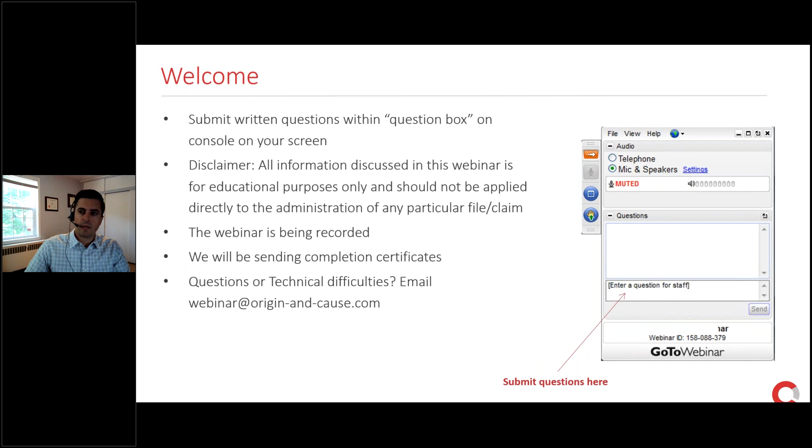All right, thank you, Mark, and thank you everyone for attending the presentation. I am going to be talking about agricultural equipment fire losses and trends we see with the changing seasons.

Just a little bit about myself. I'm a mechanical engineer, I'm based in our Winnipeg office, and I'm a licensed engineer throughout Western Canada. I've investigated over 800 different losses of various types. Based on that, my background and location, a number of those losses have been related to agricultural equipment and fires.

Most agricultural operations are typically tied to the changing seasons. Because of this, different equipment is operating at different times of the year and in different operating conditions. Therefore, there's some seasonal fluctuation with what fire-causing incidents we investigate. In this presentation, I'm going to be discussing the different conditions, the different work being conducted, and some of the more common fires in each season.

We'll start in the spring and look at seeding and planting operations. Then I'll move into the summer, we'll talk about haying in the fall and harvest time, and then we'll finish up in the winter and talk about fires in equipment related to working with cattle. So this isn't to say that all types of fires can't occur at any time, it's just that some are more common at certain times of the year.

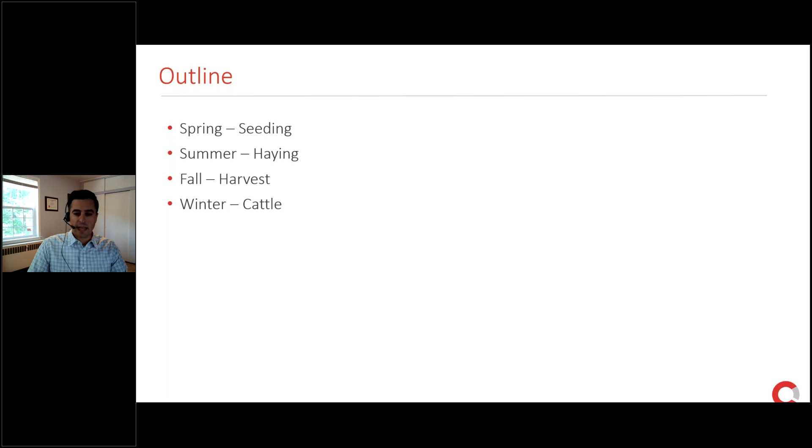So we're going to start in the spring. It is finally spring here. It was a bit late getting to spring, but we have had really good weather in the field since, so the bulk of planting is done in this area. Agricultural operations in the spring include preparing the fields and seeding.

So we're seeing bigger seeders, bigger grain carts, and that essentially results in larger loading on the tractor, increased load, increased temperature, but also you're putting more stress on engine components, hydraulics, that kind of thing. So increasing that load increases the potential for a failure.

The other thing that happens is that because this equipment is not in use through the winter, a lot of that major off-season service work can happen through the winter, and spring is the first real test to see how that servicing went. So there's the potential for failures related to service through the spring as well.

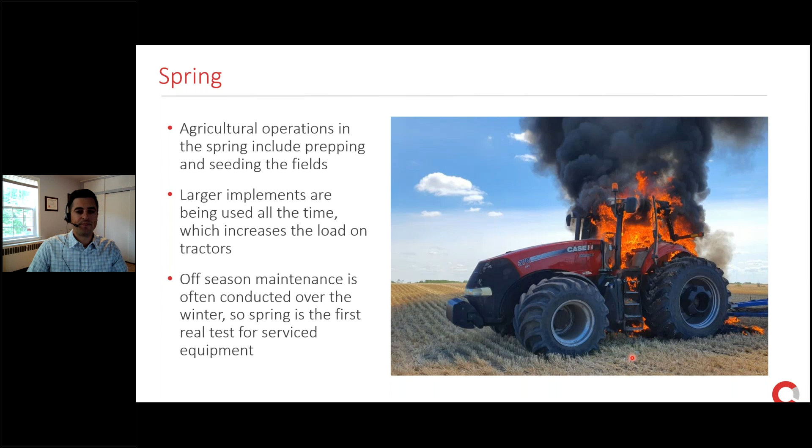Here's an example of a tractor that was operating in the field. This was pulling a harrow, so prepping the field. Harrows are used to overturn the soil. It was a large tractor, but operating under fairly heavy loads just because of the conditions.

The operator was in the field, was operating without issue. All of a sudden heard a bang, lost power, and there was flames coming from the engine compartment. This fire did spread very rapidly.

The operator shut the tractor down, exited the door here, and then actually had to jump off that top step because there's already flames coming around that area, even though he'd exited the tractor basically as soon as he saw the flames.

Service work was conducted on this tractor during the off season, and that work included replacing one of the two turbochargers on the left side of the engine.

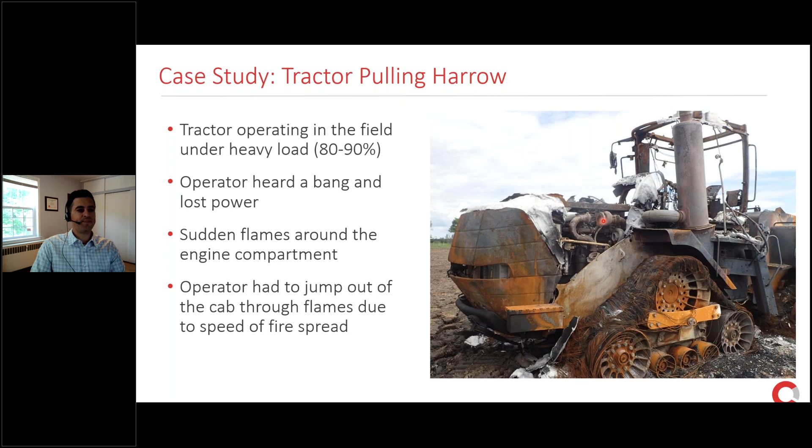Here's a view of that left side of the engine. Exhaust manifold here, and the exhaust is routed into this first turbocharger. Exhaust then goes down to the exhaust side of the second turbocharger and then out the tractor.

On this second turbocharger, you can see that the intake side is present, but we don't have that on the first turbocharger. Now, it is possible to get a large enough fire to melt off this intake side, because it's cooler, it's made of aluminum, so it does have a lower melting temperature. So it's not uncommon to see a turbocharger where the hot side's fine, but the intake side's melted off.

In this case, however, we do have a fractured section of that intake side of the turbocharger just sitting down here in the engine compartment. It is not melted, so although we had some melting damage around here, this shows that part of the turbocharger had actually fractured prior to the fire occurring and resulted in the fire.

So here's a cutaway of a turbocharger. Again, exhaust enters the hot side, spins the vane in here and then exits, and that in turn spins the shaft, which runs the compressor vane. Air is incoming, pressurized, and then sent to the engine under pressure.

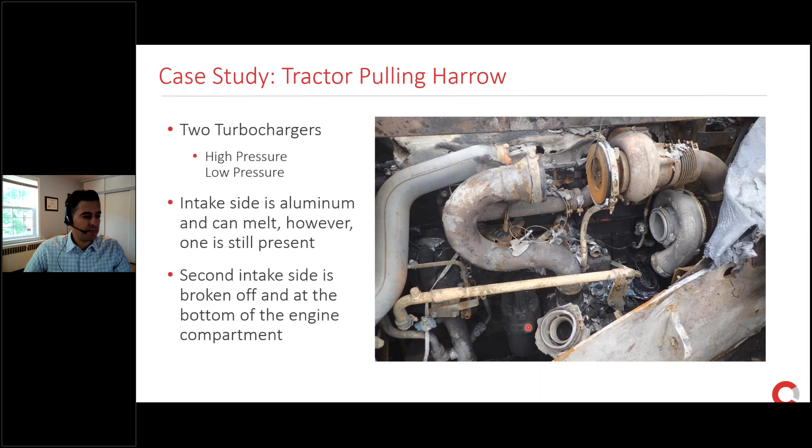The profile right here of the intake side of the turbocharger is actually what we're looking at right here. And if you flip this over, that's what we're going to be looking at. You can see some scraping damage on the housing, and this damage occurred as that compressor vane blew apart and fractured the turbocharger.

So we know the turbocharger failed, and that resulted in the fire. Now we have to be looking at whether or not this was an installation issue or a manufacturing issue.

The turbochargers are supplied with oil. So there's an oil inlet here coming off the engine, and that's going to be lubricating these two bushings. The reason for that is once the shaft spins, it's essentially spinning on a film of oil, so you don't have any rubbing damage on that metal.

In this case, we were able to confirm that the oil line was connected properly. There was oil supplied to this turbocharger. So the failure in this case was due to an internal issue with that turbocharger.

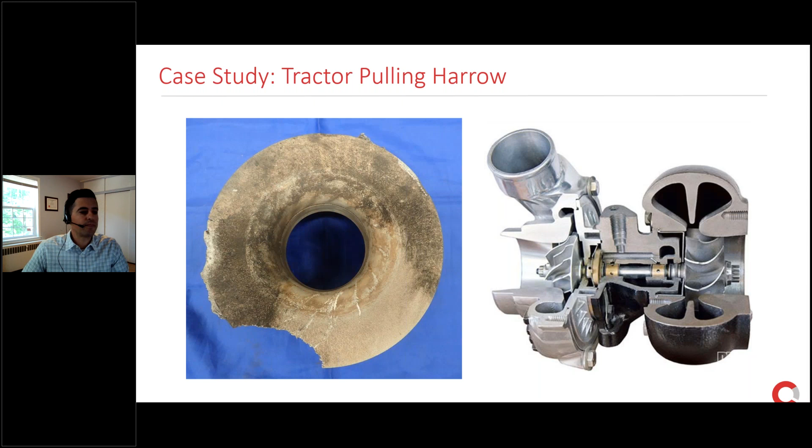So now we're going to move into the summertime. Agricultural operations in the summer, we do see some spraying chemical fertilizer in the field. We don't really get as many fires with that equipment. Sprayers still have an engine, so there's still the potential for fires and failures there, but due to the layout, the amount of work and the loading on it, it's less of an issue typically.

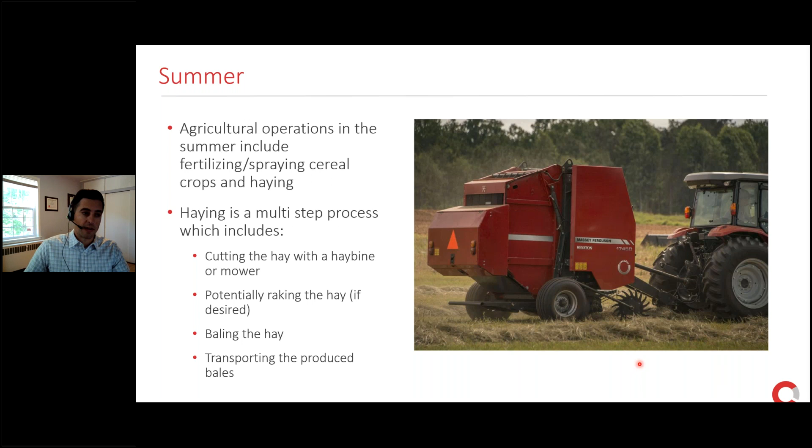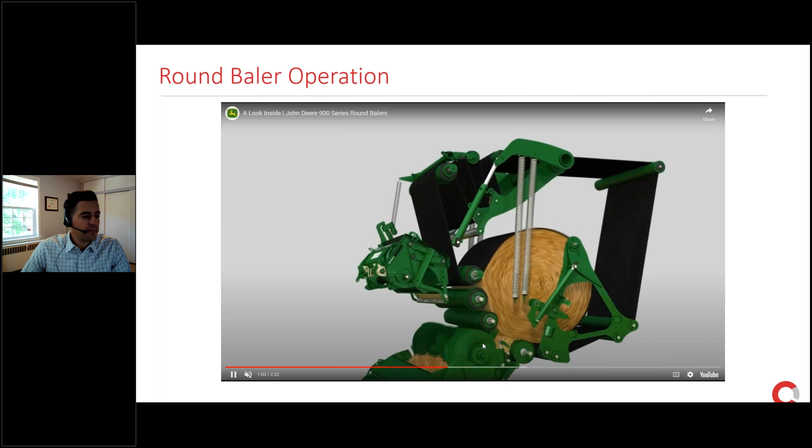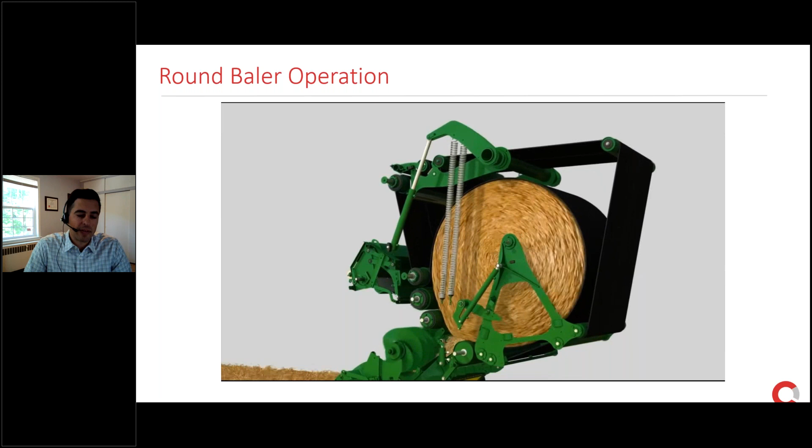I'm going to pop up an animation of a baler operating. Basically it's starting to pick up the hay through the pickup in the bottom as it travels along. It rolls in here, and you can see there are a number of rollers throughout, and a belt helps keep pressure on that bale in order to keep everything in the right place and also keep it larger and packed.

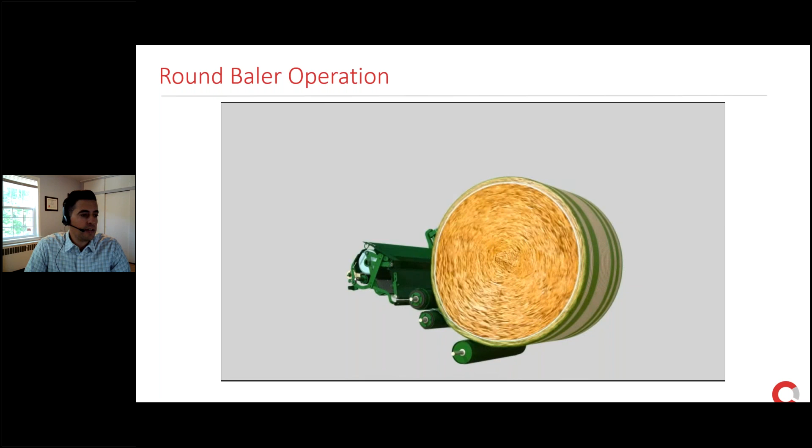After the bale is produced, it's wrapped to keep it all together once it's ejected out of the baler. It used to be twine that was used; now we see a lot more net wrap that does the whole thing at once, which is a lot quicker operation. Once the bale is wrapped, it's ejected, kicked out of the baler, and it can be pulled along to start getting new material in there.

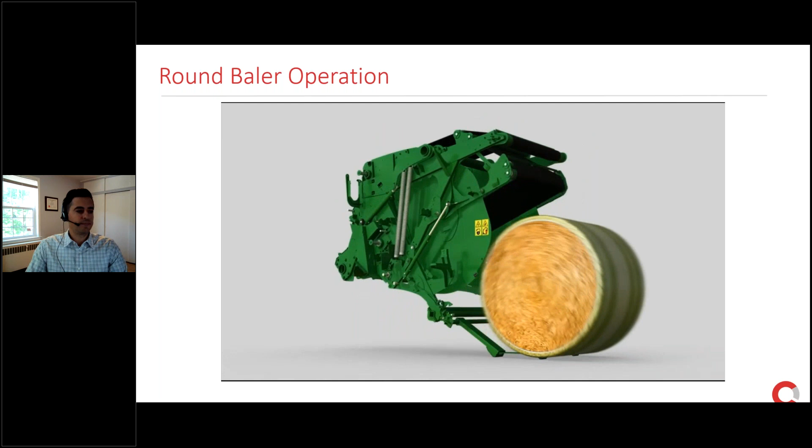A couple days prior to this fire occurring, there were two rollers and some belts changed inside the baler by a third-party service company.

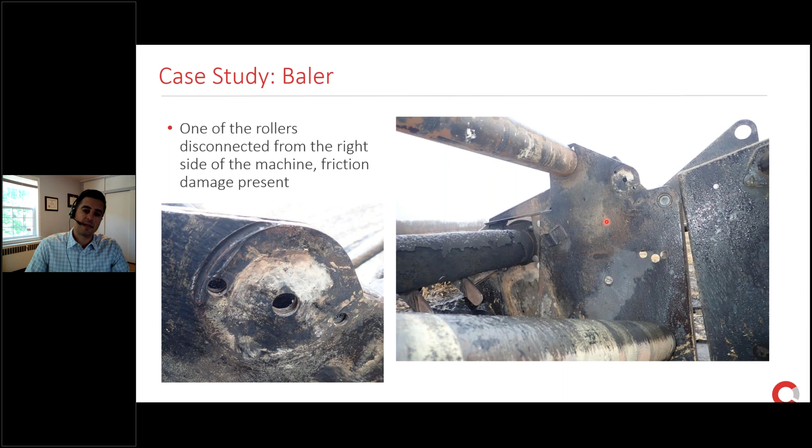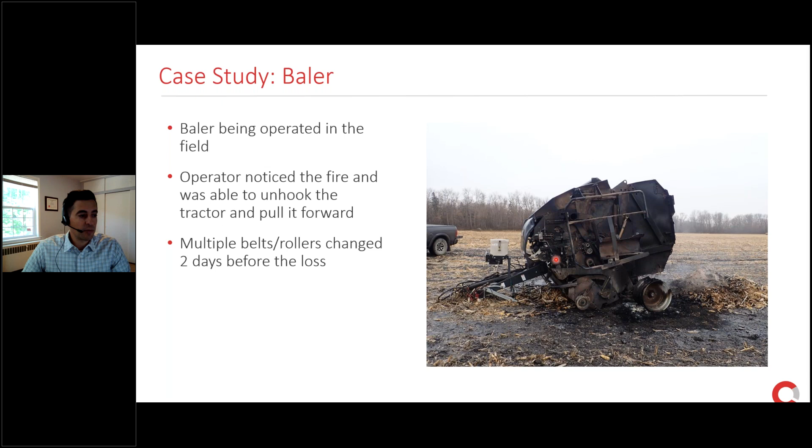I'm just going to go back a couple slides here to show the side of the baler. There's a device right here that is a centralized grease port, with one on both sides of the baler. The grease is supplied there, and then these lines take it to different locations throughout the baler where the grease is required.

This bearing did have one of those grease fittings coming from the centralized port. It was fractured and damaged, but it was still attached in the proper location. There was evidence that the other bearings on the baler were being greased, so it did appear that the standard greasing procedure had been followed.

This is that incident side of the roller. This is where the bearing would be located, but the bearing was not present. So not only was there rubbing damage on the side of the baler, but essentially the whole bearing could have gotten wrapped up in that bale, which would have been hot enough during failure to ignite it.

This is the opposite side of the roller - this was the intact bearing. Basically the inside of the bearing is around that roller, secured to the roller, and then there are the rolling items in here. In this case it's a ball bearing, so there are a number of steel balls in there, and the outer race was secured to the side of the baler. Because it's just steel on steel, you do need that lubrication in there, so there's potential for failure if there's improper lubrication, but we were able to show that that wasn't the case this time.

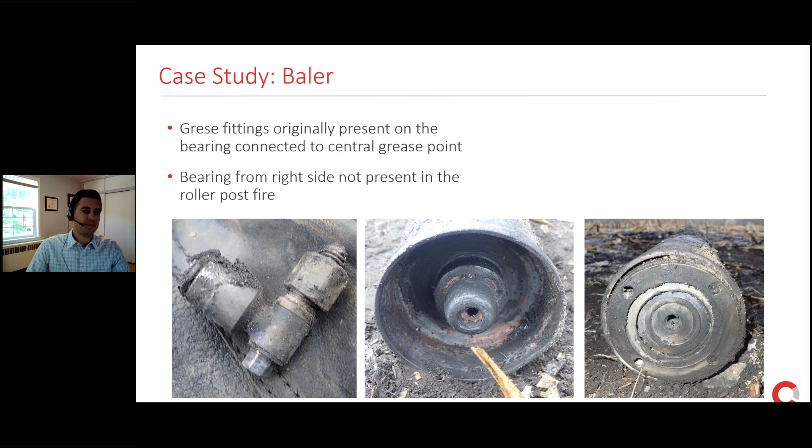Here's another example of a baler that was being operated in the field at the time of the fire. This picture makes it look a little more like wintertime than summertime, but sometimes there's just a bit of a delay between us getting involved in the file.

The reported information we received was that the baler was in the field, was operating, and they had no troubles operating. The farmer kicked out the last bale, went and parked the tractor and baler, always parking it behind the stand of trees so it's not visible from the road. He left for the day, came back to get it and start baling again, and found it in this condition.

Interesting fire patterns to note here: we have a lot of fire damage at the back of this baler, and a lot of damage at the tractor, but there is less fire damage through the middle. Not a lot of patterns to support fire spread from the tractor to the baler or from the baler to the tractor, at least visible in this photograph.

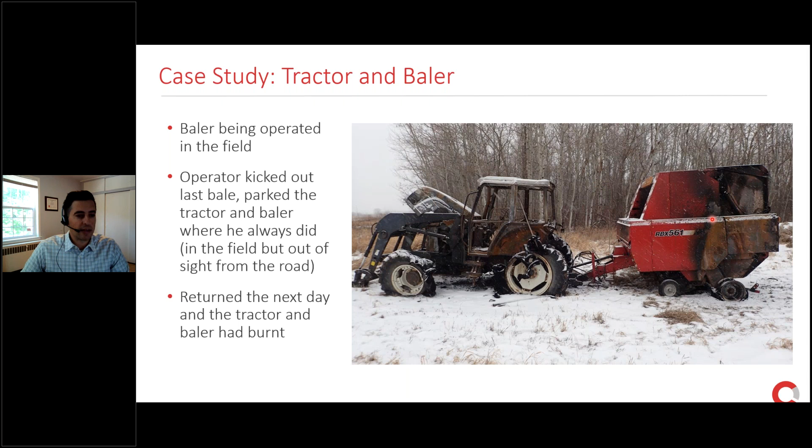Again, we're looking at rollers in that baler. There are a number of rollers throughout, and you can see that there's another one here that is not in the proper position. It's fine and connected on the right side, but not connected on the left side, either a bearing issue or a bolt issue.

But when we look a little closer at the side of the baler itself, we can tell where the roller isn't connected, but we don't see any of that same frictional damage. There's a little bit of rusting and some fire damage, but no deep gouges or anything to indicate that this failed during operation.

One more thing to notice at the back of this baler: there's actually a second roller that's also out of alignment. Once again, it's connected fine on this side, but over here is no longer connected, and similar to the upper one, there's no frictional damage on the side of that baler.

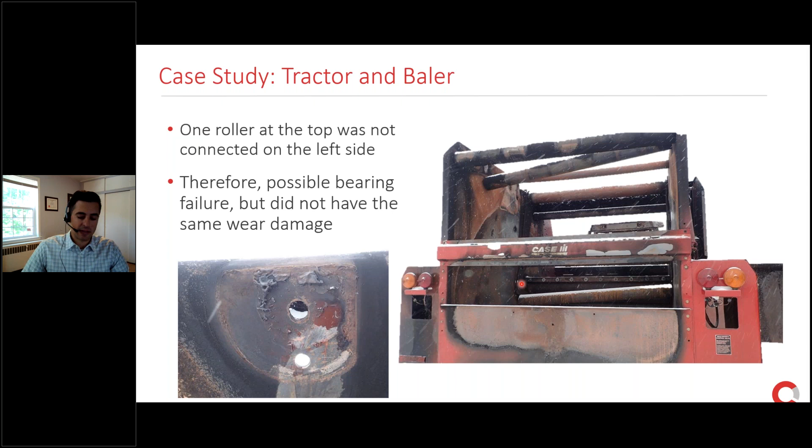Now this is the area between the tractor and baler where the baler is connected. There's a hitch on the tractor and there's one open hole, but just the way this U-hitch was designed, it might not look like it, but the baler was properly connected to the hitch. The PTO is also connected, but up here is where the electrical connection between the baler and tractor would be.

In the tractor, there's a monitor to run the baler, giving output on how the bale is forming, weight, speed of the tractor, and if it needs to speed up or slow down, and also controlling the wrapping. In order for all that to be output, the electrical connection would need to be connected.

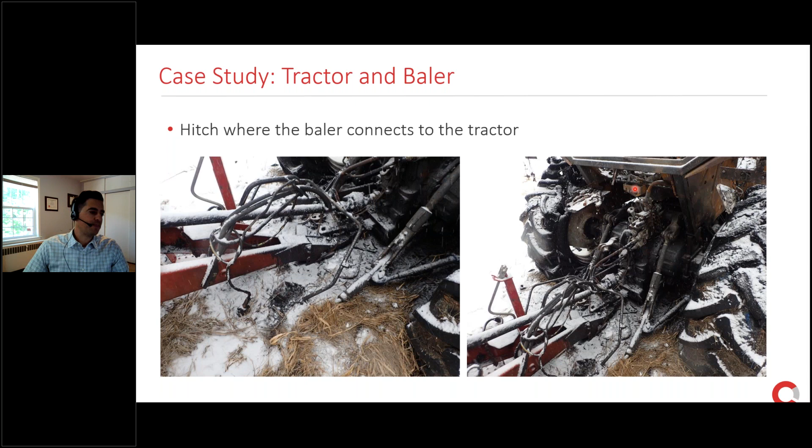But in this case, the electrical connector was just laying down by the hitch, into this organic material, and we can see that some of it actually melted and adhered to it. So this connector was definitely not connected at the tractor. Also, the way it was wrapped up here, it was physically not possible to stretch it all the way to where it needed to be connected on the tractor.

So basically, the fire patterns don't really connect between tractor and baler. There were multiple broken rollers, but no evidence that resulted in heating damage at the baler itself. And we can show that the baler wasn't even connected in the way that the owner said it was. So from this investigation, there was enough evidence to indicate that this fire was intentionally set.

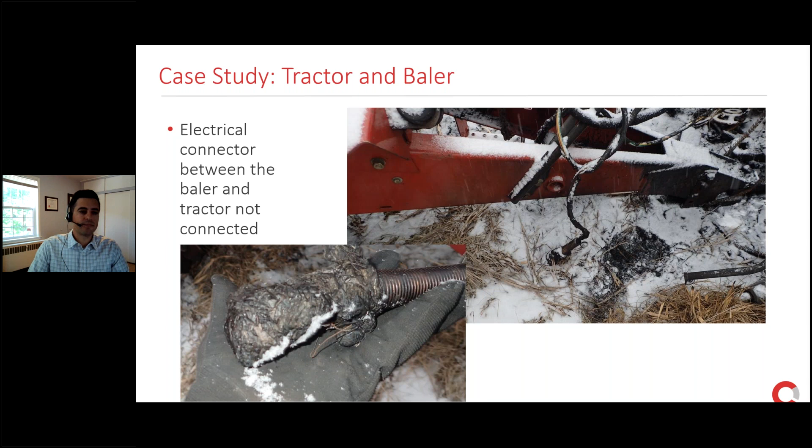Now we're going to move into fall time and harvest. There are a number of different processes that go along with harvest. In this picture, the field is being combined, so there's a combine operating, also a tractor and grain cart. You can also see straw coming off of the combine, and that can also be baled. So we have tractors and combines. If the grain's cut prior to the combine, a swather would be used and that's just picked up by the combine. I'm also going to touch on grain dryers at the end.

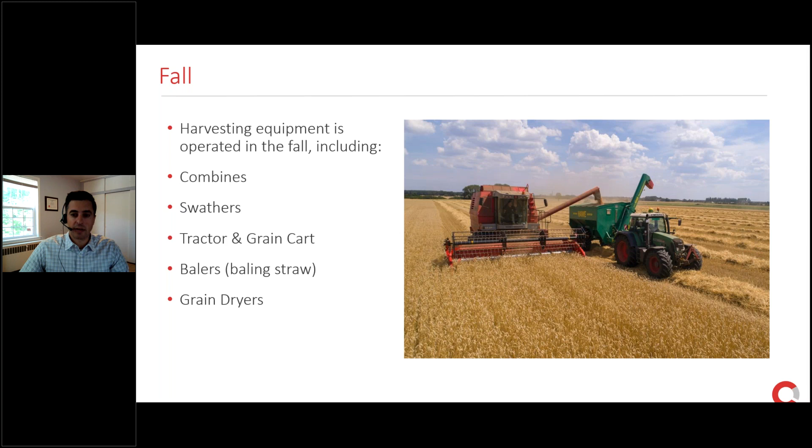It's also different in the fall time than summer because the crop's allowed to mature, needs to mature, but that also results in it being drier. So there is more potential for dry material to build up as opposed to the wetter material during haying time. So there's a little even more potential for fire resulting from the conditions.

Typically with harvest, depending on the conditions, it's possible for combines and harvesting to be completed for long hours, even around the clock if conditions are right.

But that does create other issues in terms of servicing, proper cleaning, and third-party servicing. If anything goes down, there's usually more of a time crunch to get it fixed.

Also, emission standards are increasing, resulting in hotter exhaust temperatures and other means manufacturers use to mitigate emissions. That's increasing the potential for fires related to hot surfaces.

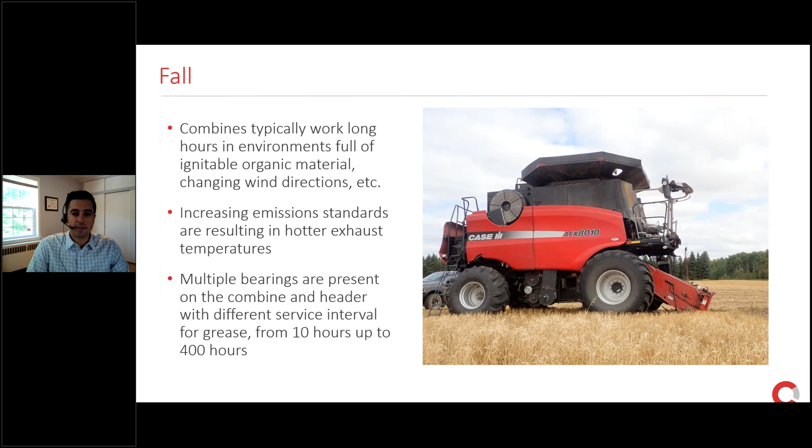There are different service intervals for different bearings present. The header's not attached here, but there would be some in the header where the service interval could be as frequent as every 10 hours. Moving into other parts of the combine, it could be as much as 400 hours for greasing. So if this combine is operating around the clock, that means stopping to grease the bearings two or maybe more times per day to follow those recommendations.

Now, like I said, it's possible for bearing-related failures to occur and cause a fire, but that's not the only potential fire cause on a combine.

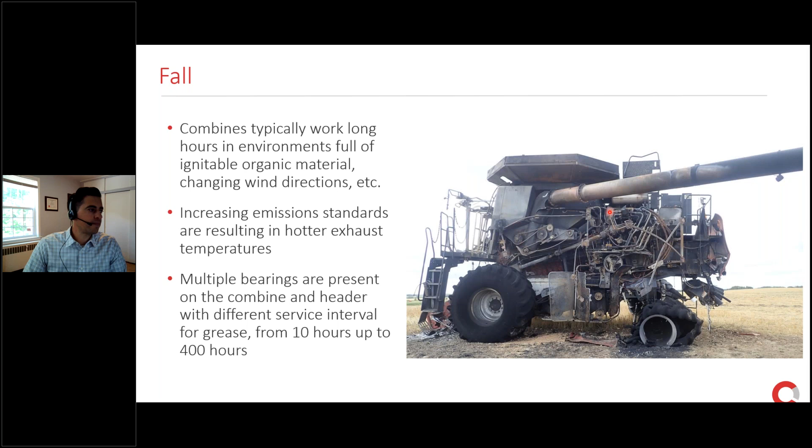Here's another combine that was operating in the field. This one was operating for several hours, but in this case they didn't really get going until around noon, and the fire was closer to 4 or 4:30 in the afternoon. The farmer said that gives them a chance every day to open up the combine, open up all the covers, and use a leaf blower to blow out all the organic material that collected, as much as they could get out with the leaf blower. They were also able to show they'd been following recommendations on how to grease and service those bearings in the combine.

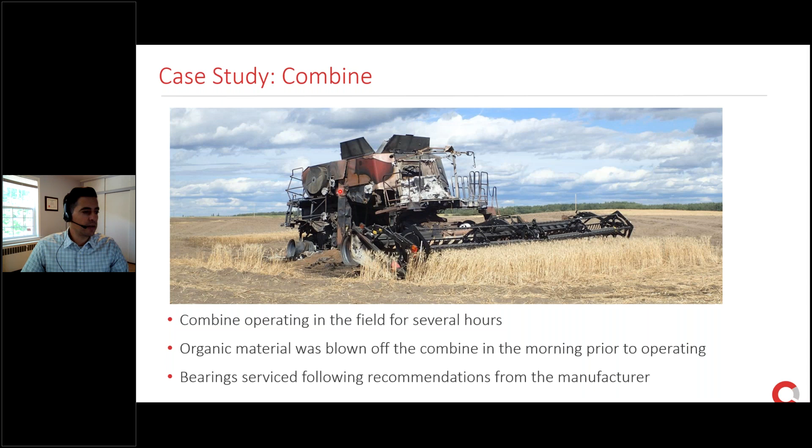In this case, the fire occurred on the right side of the combine. It actually wasn't the combine operator who noticed the fire. It was a grain cart operator also in the field who saw fire in this area on the combine, radioed the combine operator, who then shut down, still had no problems operating the combine, got out, and tried to suppress the fire in this area with handheld extinguishers, but was not successful.

And here you can see on this combine that we have a number of rotating components. There's going to be bearings at several locations throughout that need to be examined.

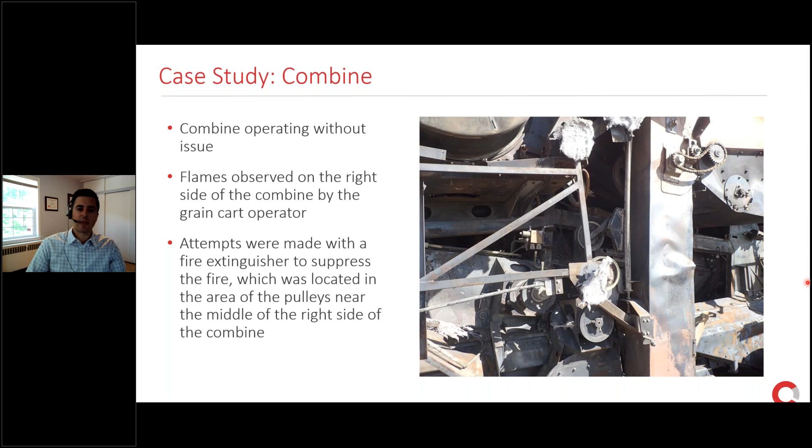Now, it is possible for bearings to get hot enough to ignite organic material that has collected on them, and that bearing could not fail but still could ignite the material. But this isn't something very easy to identify post-fire, because if the material burns away and the bearing doesn't fail, we don't really see evidence of it. But it is not possible for a bearing operating or resting in a combine to be attacked by fire and have that cause it to fail.

So in this case, we have clear evidence of a bearing failure, and this would have had to have happened during operation of the combine, and is most likely what started the fire in this case.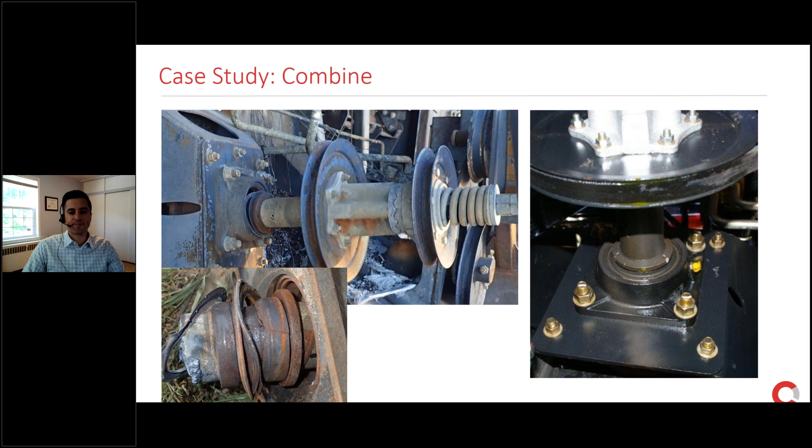And lastly, in the fall and harvest time, I'm going to talk a little bit about grain dryers. Grain dryers aren't used every year, so it depends on harvest conditions, the moisture in the grain, and the toughness. You can get large grain dryers at terminals down to much smaller dryers, and farmers might have their own individual dryers. We also see both continuous style and batch style dryers.

The way a batch style grain dryer works is that the dryer is filled with grain, heat is applied to dry it, and then that dry grain is removed and the next batch can be brought in if required.

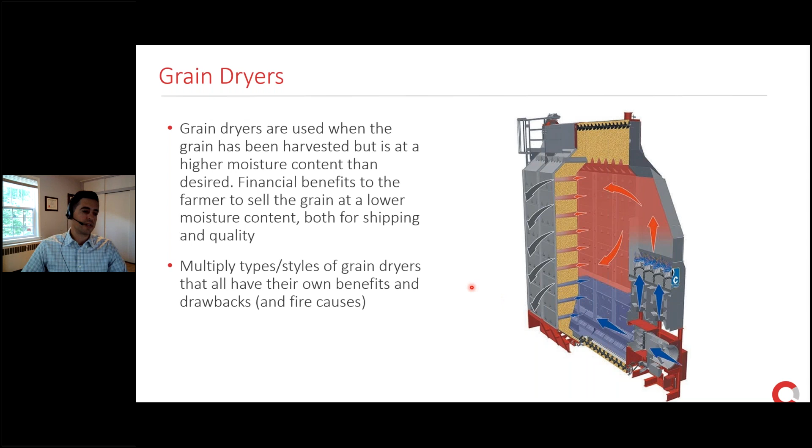So basically, with a grain dryer, you light a big fire and blow that towards ignitable material. So there's definitely the potential for this to end badly and cause a fire.

Potential failures could be related to burner issues, a burner malfunction, or improper combustion causing problems with that burner. Grain dryers are supplied with either propane or natural gas, so if there's an issue with the gas supply, or if the wrong gas is supplied, that can cause an issue.

Also, there are measurement devices throughout the dryer. There will be temperature sensors in the hot air plenum, temperature sensors in the grain, air proving or airflow sensors, that kind of thing throughout. If you have a problem with some of those sensors, maybe the burner is being asked to supply more heat than is required just because that sensor isn't working.

It's also possible to get a problem with fans and airflow. If you don't get proper airflow through the dryer, it's possible that localized hotspots will be created, and that could lead to issues. Also, that hot air plenum is typically set hot enough that it would ignite the grain if it's left in there long enough.

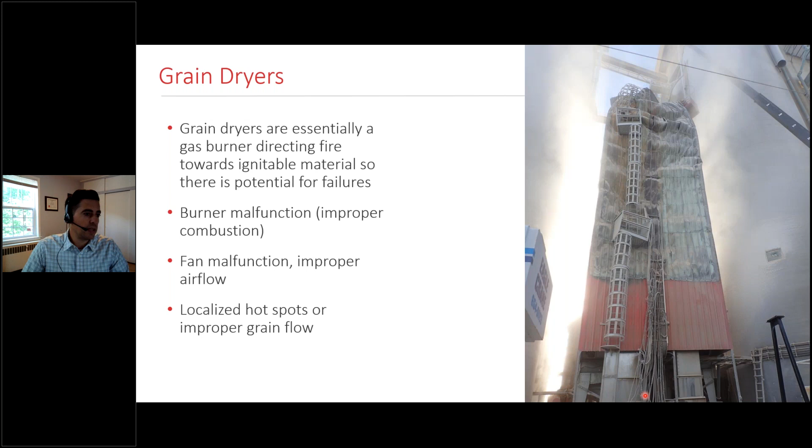Grain enters the top in here, and this is the grain column, so the grain would slowly flow through the dryer and out. And like I said, there are a number of fans at the top of the dryer in this location that are going to be pulling that hot air through the grain and exhausting it out the top.

One of the things with this grain dryer is that there were a number of temperature measurement areas in the dryer. A lot of that historical data was saved, so we were able to look at temperature and airflow through the dryer for multiple days leading up to the incident to aid with that investigation.

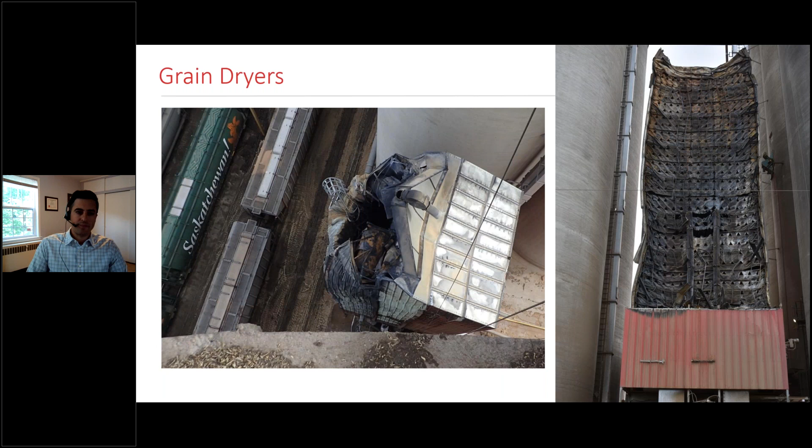Unfortunately, like every year, we once again have come to winter. We don't really see fire losses in the winter related to tractors in the field because they're not in the field, but we do still see a lot of fires related to tractors or equipment working with cattle.

Typically, this could be something like a bale shredder, which is essentially a large blender. Those bales that were produced in the summer and the fall, you'd put a couple of these into the bale shredder, pull it behind the tractor, and it would chop up that bale.

And as you can imagine, if you put a bale in a blender, especially when you put a little bit of wind into the equation, there's going to be organic material essentially flying everywhere.

There are also a few other challenges with winter. It's a lot harder to clean and maintain equipment, especially in an area where you're getting lots of freeze and thaw. Some of this material may be thawed enough to stick, and then it gets frozen, so it could be very hard to clean out and remove organic material that is collected. There are also other issues with things freezing and breaking, maintenance being harder to conduct, that kind of thing.

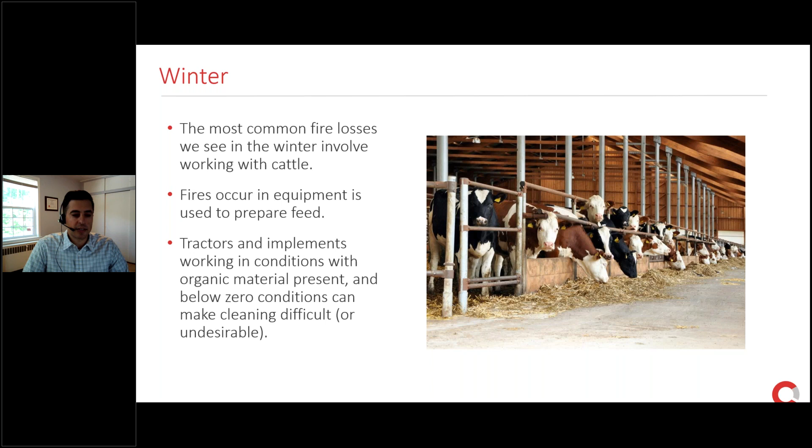Over the last few years, I've looked at a number of fires related to a specific manufacturer, a couple of manufacturers, and fires around the SCR.

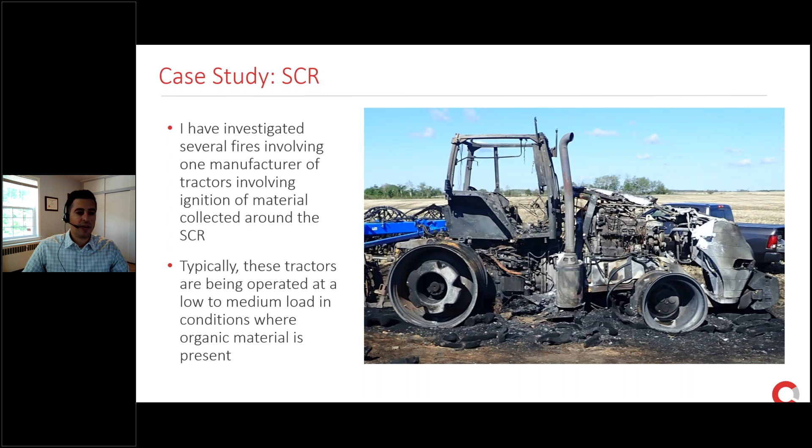Typically in springtime when they're in the field, they're operating for a lot longer, so they might be under more load, but there's less organic material and more cleaning happens. In the wintertime, they may be used for only 20 minutes to an hour a day, and that's it. So there's more organic material around, but also less cleaning occurs since it's not used as often.

Here's an example of a similar tractor, same setup, and you can see the SCR tank's not visible because it's shrouded in plastic. The reason is that these tanks do get hot, so it's a personal safety issue. The manufacturer covers this in plastic so someone doesn't lean on it and accidentally get burnt.

The problem is that it makes it more onerous to clean. I have taken all the plastic off, cleaned that tank, and put the plastic back on, and it's taken me close to an hour. In the owner's manual, the manufacturer recommends cleaning off all exhaust components once a day. But who's going to want to spend an hour cleaning this every day and then use the tractor for only 20 minutes?

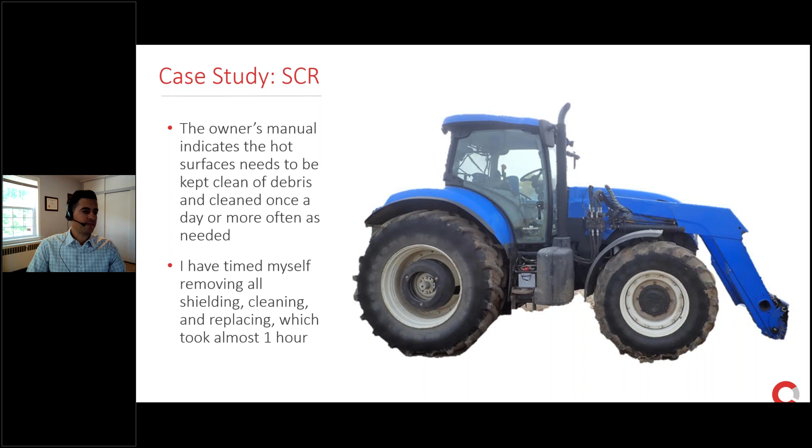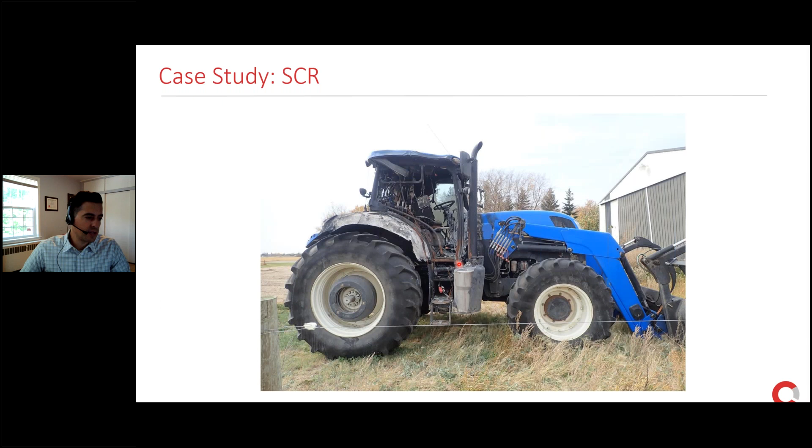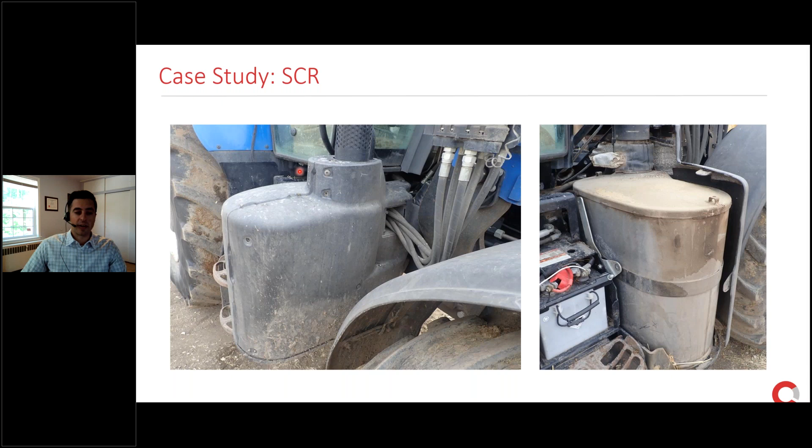Reported information: everything was operating fine. The operator saw some smoke coming up, got out, and saw a little bit of fire down in this area. Going back one, with fire in this area, that's basically the first opening above the SCR where that fire exits the tractor.

So here is that same tank with some of the plastic removed. This is the exhaust entering the base of the tank. The exhaust is hotter in this location just because it's closer to the engine where it's being produced, and it's slowly cooling throughout. But that means this is the hottest spot where the exhaust enters.

There's some glass in this area post-fire, but we also have a collection of organic material—some here, a lot more on the backside, and some even caught above that Y there. After peeling that material away, I found organic material pressed up against the SCR tank. That material had decomposed and was charred and burnt, and the fire pattern showed the fire started right adjacent to that tank and spread up from there.

So in this case, the cause of the fire was the ignition of combustible material against that SCR tank. Now, I have done several joint examinations with the manufacturer.

Every time they've said that these tanks don't get hot enough to ignite material. They've done studies of their own that show this. I've asked to see the data and results of those studies, but they always tell me it's proprietary information, so I don't get to look at it. So they say they've done studies to show what temperature it gets to, but they're not willing to share that information.

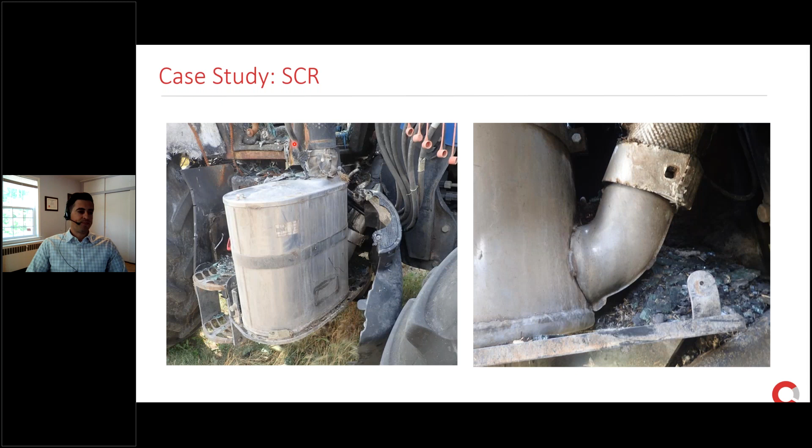So just a few takeaways from the presentation. We started off in spring, and as I said, it's not uncommon for service work to be conducted before spring. A lot of the equipment is down over the winter, so because of that, spring becomes the first real test of some of this maintenance.

It is important to collect that information on off-season maintenance just to see what maintenance occurred, so that we can compare that to what the fire damage was, compare that to the fire cause, and see if that maintenance could have resulted in the fire.

Throughout the different case studies, I tried to show that we might come to a fire cause, might see that, yeah, we have this bearing that failed, but there are still a few different reasons for that failure that need to be considered. Is this a result of lack of maintenance, not enough grease put in by the owner or operator? Is it possible there's a manufacturing defect that led to the failure? Is it something to do with recent service? Or could it be an equipment design issue, like that one combine where the heavier bearing was put in?

So it's one thing to come and determine a cause, but then there's also work that needs to be done to attempt to determine the reason for that fire cause and who's at fault.

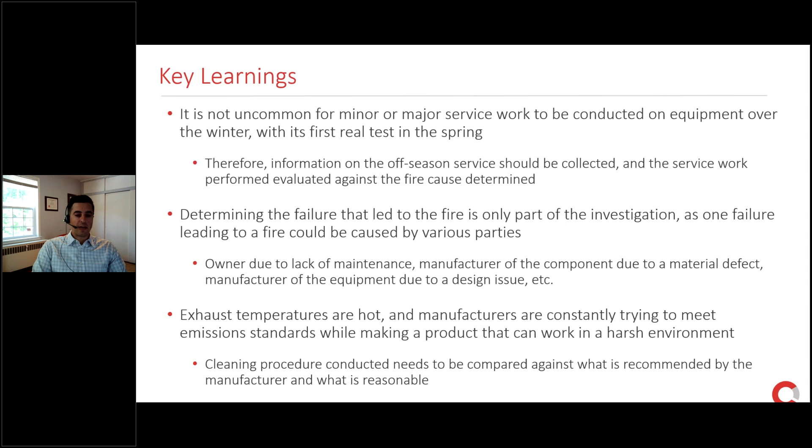So that— Thank you so much, Matt. Oh, sorry. Hey, from— go ahead.